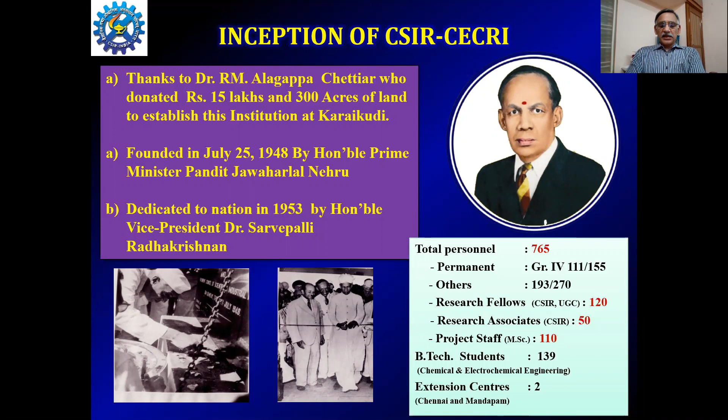Devoted fully to electrochemical science and technology, CECRI has various core strengths: corrosion and material protection, electrochemical power systems, electrodics, electrocatalysis and bioelectrochemistry, electroplating and metal finishing, electroorganic and material electrochemistry, and electrochemical process engineering.

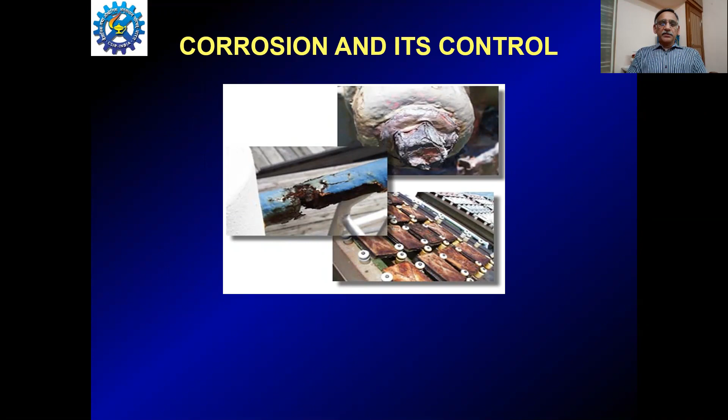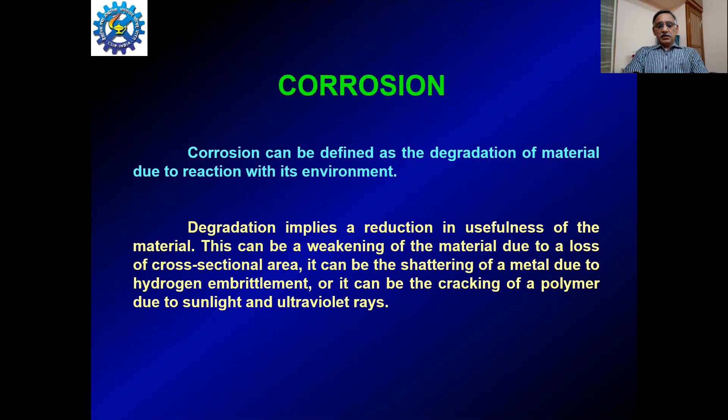Coming to the subject, corrosion and its control. What is corrosion? Why is it so important? Let me start my talk with the book definition of corrosion. Corrosion can be defined as the degradation of material due to its reaction with its environment. This degradation may be the reduction in the useful properties of the material, or the weakening of the material due to thinning and so on and so forth.

Corrosion causes huge economic loss, not only to the industries but also to the households. For a nation, whether it is developed or under development, it amounts to around 3 to 5% of its GDP towards corrosion and its mitigation. There are various losses which make corrosion so significant. It can be classified into two categories: direct losses and indirect losses.

For example, the cost of materials lost due to corrosion comes under direct loss. The cost due to coatings and their application to mitigate corrosion comes under direct loss, and the use of corrosion inhibitors, or the cost of corrosion inhibitors, also comes under direct losses.

There are other indirect losses also. For example, if a company or industry is forced to shut down due to a corrosion problem, then the production time lost and the product lost is also an indirect loss - loss of product, probably leakage of some petroleum products, etc. in the petroleum industry, and loss of efficiency, for example, the loss of heat transfer efficiency of heat exchangers due to corrosion, or contamination of food products.

For example, if it is a food material manufacturing industry, for example infant foods and so on, the existence of corrosion at one point or other may contaminate the product and make it non-saleable. It also leads to the conservation of metal resources and ultimately human safety. If it is a collapse of a bridge due to a corrosion problem, or a collapse of a multi-story building or a nuclear reactor due to corrosion, ultimately it results in a human safety issue.

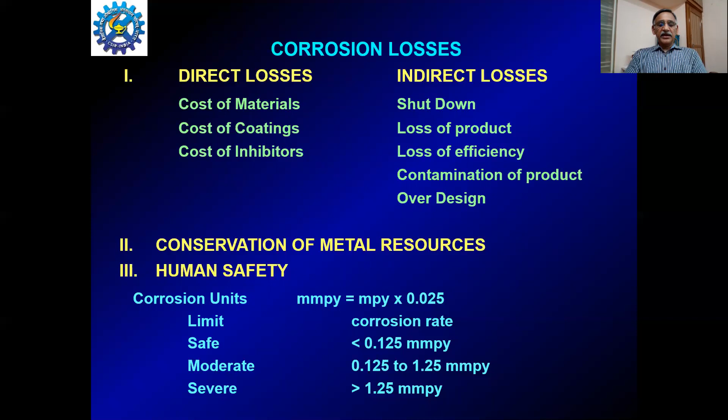Like blood pressure or diabetes, corrosion can also be classified into 3 categories. If the rate of corrosion is less than 0.125 millimeter per year, it is designated as safe. If it is 0.125 to 1.25 millimeter per year, it is moderate - one can live with it. And if it exceeds 1.25 millimeter per year, it is termed severe corrosion, and one needs immediate attention to be paid to it.

Let me go into the little chemistry part of corrosion. For example, take magnesium metal. When magnesium is exposed to atmosphere or immersed in water, it will have a reaction like this: magnesium plus water plus oxygen gives magnesium hydroxide.

The delta G, which gives the free energy for this reaction, is minus 142,600 calories. Take the example of gold.

If a similar piece of gold is placed in water or kept in the atmosphere, gold plus water molecule plus oxygen gives this hydroxide. The Gibbs free energy for this reaction, delta G, is plus 15,700 calories.

A higher negative value of Gibbs free energy predicts that a reaction is more spontaneous, whereas a high positive value says that it is not at all spontaneous.

So among the metals, there are some metals which can immediately react to the environment, and they are called active materials as far as corrosion is concerned.

There are some metals like gold which will not react spontaneously with the environment, leading to corrosion, and hence they are called noble metals. Where are these metals obtained from?

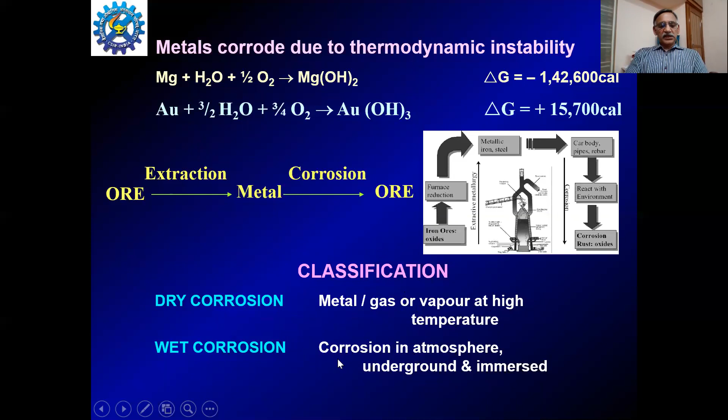We normally come across this wet corrosion, and we are going to see the chemistry part of wet corrosion in the coming slides. Let me take the example of zinc, which is a highly active material.

Zinc dissolves with hydrogen evolution. All chemistry students or chemistry faculties know this.

When a piece of zinc is put in a beaker of hydrochloric acid, this is the reaction which will occur: zinc plus hydrochloric acid gives zinc chloride plus hydrogen.

One atom of zinc metal reacts with two molecules of hydrogen chloride to form one molecule of zinc chloride plus one molecule of hydrogen gas.

This is very spontaneous. Immediately when you put zinc into the hydrochloric acid beaker, this reaction takes place. So zinc is known as an active metal, as I already mentioned.

Take the example of platinum. If you put platinum in the same acid, it does not react. Hence, as I already mentioned, platinum, like gold, comes under the category of noble metal.

Let me explain the reactions involved in this process using a small cartoon. Take a small rod of zinc, and this is a small beaker containing hydrochloric acid.

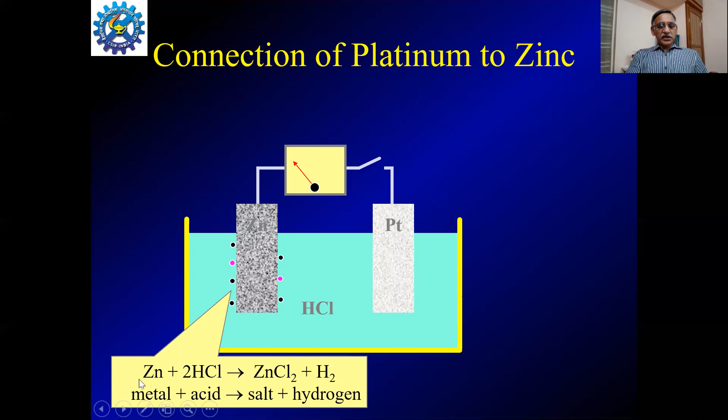Now, the reaction, as I already introduced: zinc plus 2HCl gives zinc chloride plus hydrogen gas. Now I am connecting this switch.

Now the switch is connected, so the zinc is electrically connected to the platinum. What happens here? The zinc metal dissolution occurs on the zinc surface. You can see all the pink dots got transferred to the platinum surface because there is an electrical connectivity between these, and also you can notice that here the current flows.

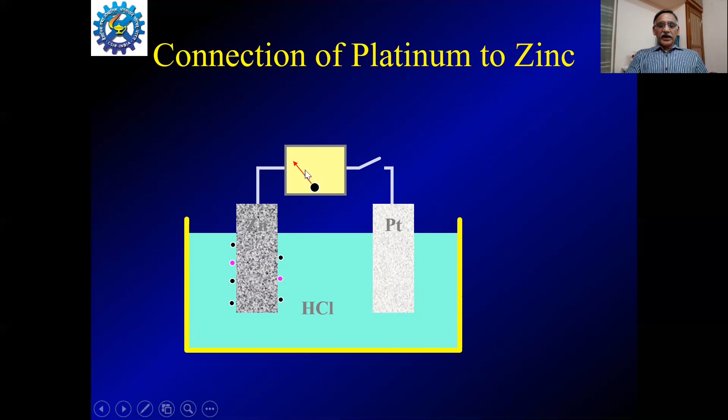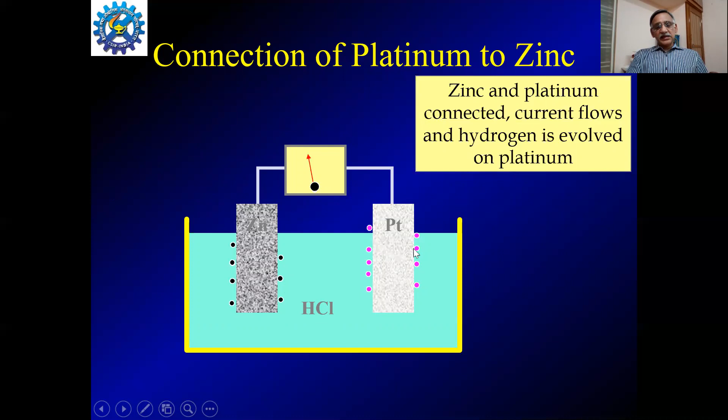When the switch is open, there is no flow of current. When the switch is connected, there is a flow of current. Zinc and platinum connected, current flows, and hydrogen is evolved on platinum. Here you can see only black dots, that is the metal dissolution on zinc surface, and the pink dots, that is the hydrogen gas evolution on the platinum surface.

Here what happens? 2H plus, the hydrogen ions available in the hydrochloric acid, plus the electrons which are available from the zinc dissolution, which are transported through this wire, reaches the platinum surface, reacts and forms hydrogen gas.

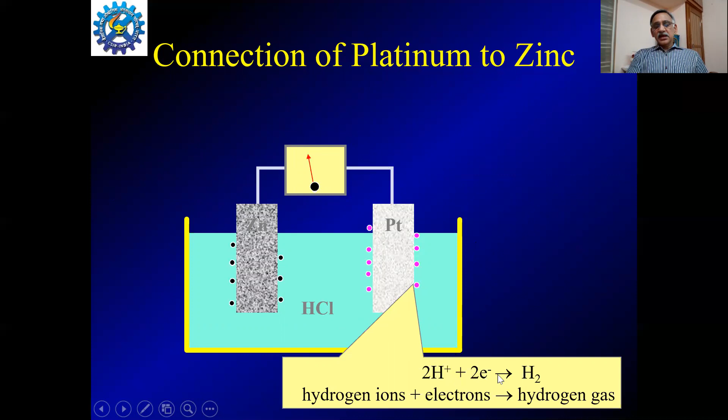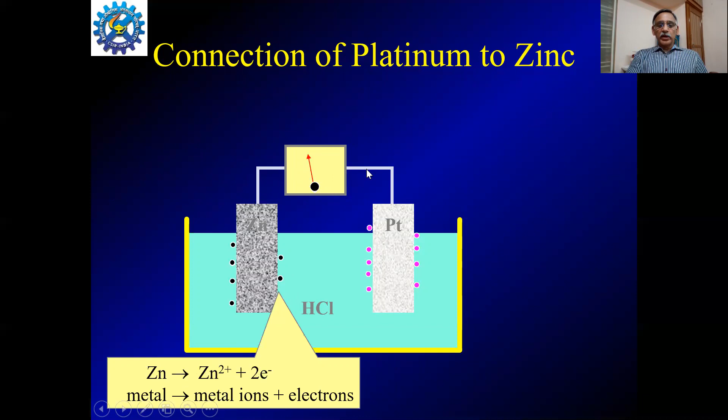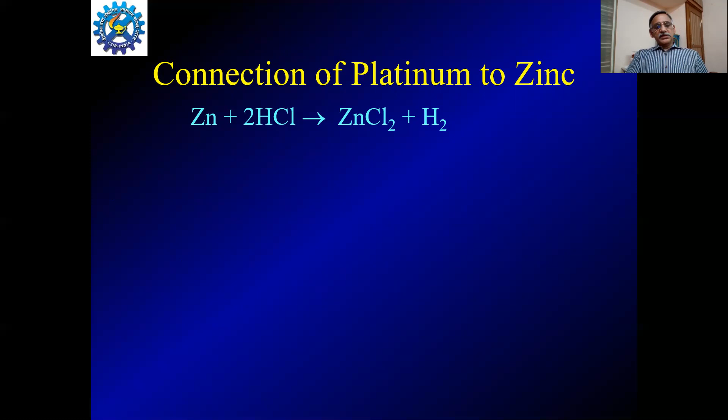So the reaction occurring here is zinc dissolves into zinc 2 plus ions. These ions, black colored dots, leave the metal matrix and go into solution as zinc ions. And these two electrons are liberated, and these electrons travel through the external wire to the platinum surface and get consumed like this. So when we connect zinc and platinum together in a hydrochloric acid trough, this original reaction, zinc plus 2HCl gives zinc chloride plus hydrogen gas, can be split into two reactions.

One is zinc gives zinc 2 plus ions plus 2 electrons. One atom of zinc metal dissolves and gets into solution as one zinc ion, which is into the solution, and 2 electrons remain on the metal surface.

And these 2 electrons get transferred to the platinum surface by the reaction, and there it will consume 2 hydrogen ions available in the acid near the surface of the platinum, combining with these 2 electrons which are liberated here and transported to the platinum surface to form hydrogen gas.

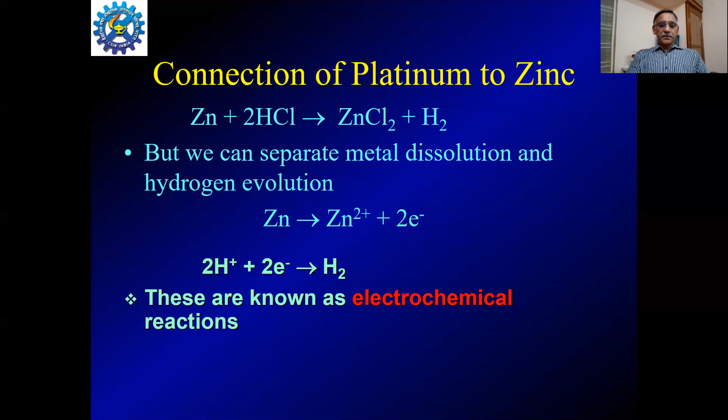These are known as electrochemical reactions. Why is it so? It is not only a chemical reaction, it involves the electrons also. So a chemical reaction involving electrons is termed as an electrochemical reaction. Hence, the corrosion phenomena itself is an electrochemical reaction. Reactions that involve both chemical change and the transfer of charge are termed as electrochemical reactions.

So the various reactions, like the previous zinc gives zinc 2 plus 2 electrons, these are called anodic reactions. The various examples are zinc gives zinc 2 plus 2 electron, zinc corrosion. Iron gives Fe2 plus 2 electron, iron corrosion. Aluminum corrosion, and then ferrous ion further oxidation, etc.

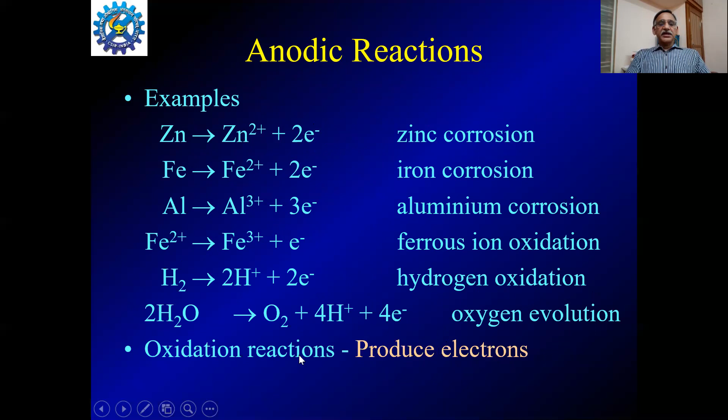In all these cases, the electrons are liberated, or these reactions produce electrons, and they are termed as oxidation reactions, or otherwise called anodic reactions. Similarly, cathodic reactions are those which consume electrons.

For example, the water molecule plus the dissolved oxygen plus the electron gives 4 OH. This is oxygen reduction, hydrogen evolution, copper plating, ferric ion reduction, and all. Here you can see all reactions consume electrons, and they are called reduction reactions or cathodic reactions.

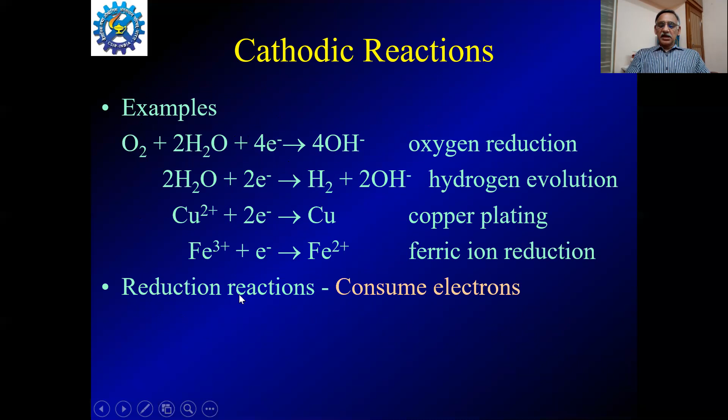So, in a nutshell, say for example, if you take the case of iron in hydrochloric acid, similar to zinc, if you place a small nail in hydrochloric acid, you will have the reaction Fe plus 2 hydrochloric acid gives FeCl2 plus hydrogen gas. This can be split into 2 reactions as earlier.

Fe gives Fe2 plus 2 electrons, which is an anodic reaction or oxidation reaction. And another one is 2H plus 2 electron giving hydrogen gas. This is a cathodic reaction.

So what one should know is the corrosion reaction is an electrochemical phenomena. This reaction itself is constituted by 2 complementary reactions: one is anodic reaction and another cathodic reaction. These 2 reactions occur simultaneously.

So if you want to control corrosion, any one of the reactions should be stopped. For example, if one can stop this hydrogen gas evolution in the acid medium, then the corrosion will not proceed, because charge neutrality has to be maintained.

Various examples for other environments: if it is an atmospheric corrosion, the anodic reaction is metal dissolves, giving metal ions plus electrons, and ultimately it forms, with the available moisture, metal hydroxide. The cathodic reaction will be the oxygen and water molecule or moisture plus these electrons giving hydroxyl ion formation.

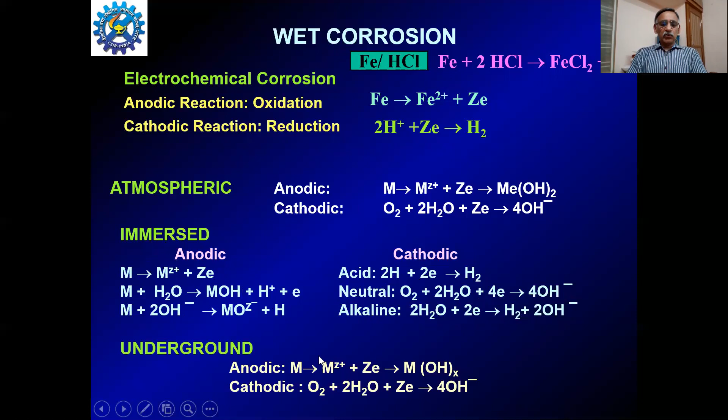Similarly, for the immersed condition, we have the metal dissolution as anodic, and if it is an acidic environment, the hydrogen ions available in the solution combine with the electron to form hydrogen gas. If it is neutral, the dissolved oxygen available in the water combines with the electron to form hydroxyl ions, and in alkaline, the water reacts with the electrons to form these kinds of hydroxyl ions. Similarly, for underground also, we have anodic and cathodic reactions.

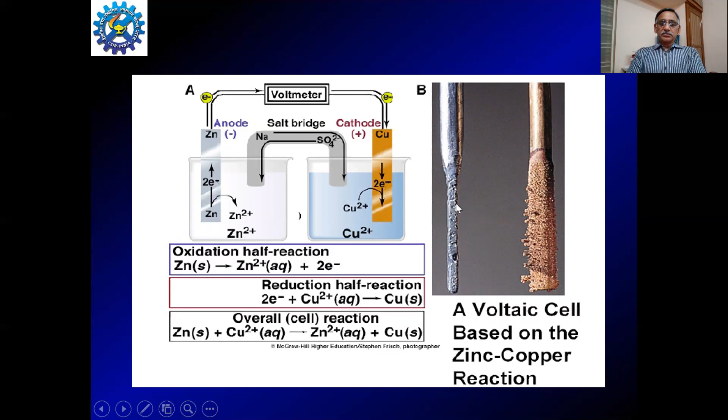On reaching the copper, there are plenty of Cu2+ ions available in copper sulfate solution, and they combine together to form copper atoms and get deposited over the surface. After some time, the zinc rod dissolves or thins due to corrosion, whereas copper electrodeposition occurs and hence thickness increases.

If you take a beaker containing hydrochloric acid and put zinc and iron in it, you can witness a vigorous corrosion reaction with enormous gas bubbles or hydrogen gas evolving from the surface of these metals.

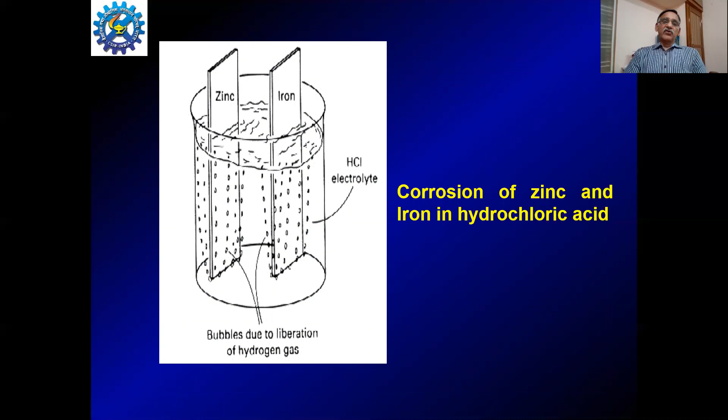How has this happened? Earlier I demonstrated that when we combine zinc and copper, zinc is the anodic or active metal, and copper is the noble or cathodic metal.

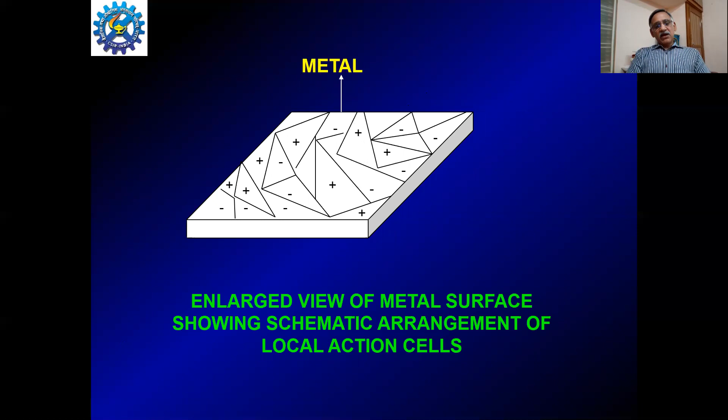If you have only zinc or only iron, still the corrosion is occurring and there are plenty of gas bubbles or hydrogen evolution. It is because on a single metal surface, for example zinc, we have anodic sites and cathodic sites which are very adjacent to each other. At the anodic site, the metal dissolves and the electrons get transported, and at the cathodic site, gas evolution occurs. So the same metal will have both anodic and cathodic sites, and accordingly it will have corrosion.

In a nutshell, when zinc is immersed in hydrochloric acid, zinc metal dissolves or dissociates from the metallic matrix and goes into solution as zinc 2+ ions. These electrons combine with hydrogen ions available in the hydrochloric acid to form H2 gas. This is the final version, or one can understand that corrosion phenomena.

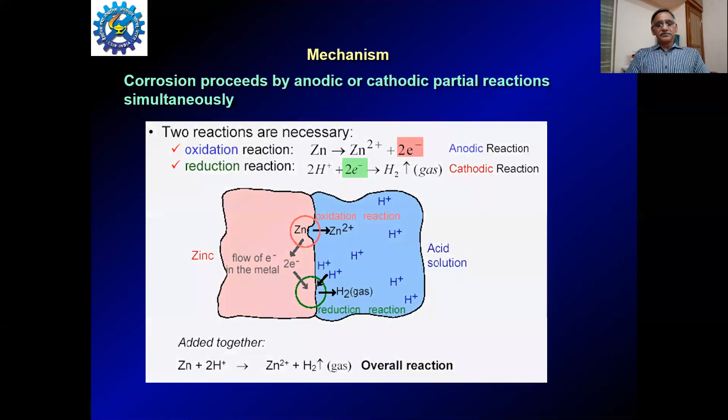The corrosion can be prevented by coating, inhibitors, cathodic or anodic protection, and design for higher wall thickness and so on. Let me introduce these things in the coming slides.

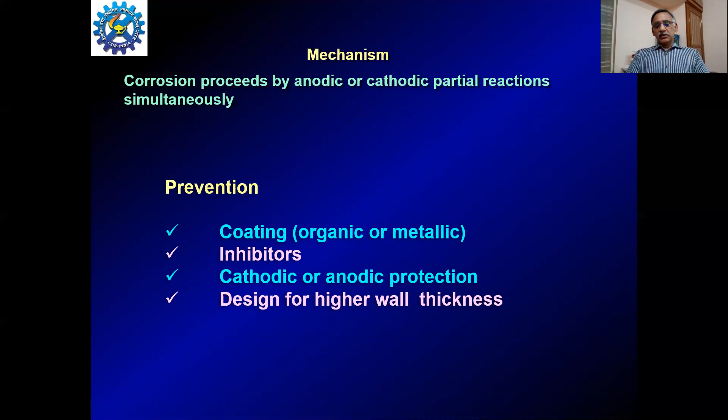There are various factors which influence corrosion. The composition of the material itself causes various anodic and cathodic sites available on the same material, whether it is a homogeneous single phase alloy; the cold working, grain shape, grain size, and so on decide where it is anodic and where it will be cathodic.

If it is a multi-phase alloy, distribution of the amount of anodic phase matters, for example aluminum copper alloy will have aluminum anodic areas and copper cathodic areas. Similarly, heat-treated alloys, for example stainless steel, will also form sensitive grain boundaries, and they will become anodic areas.

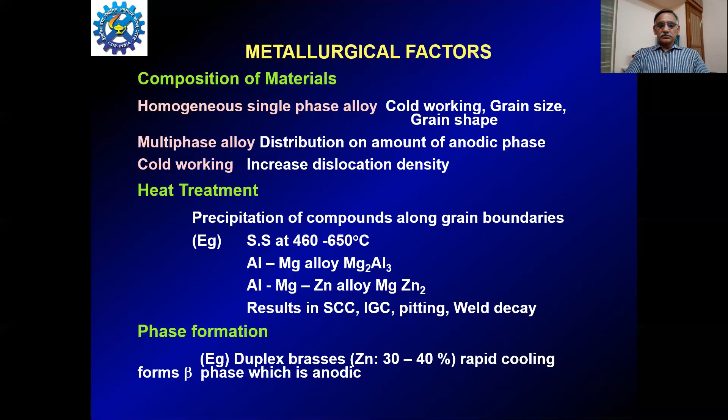Other factors which influence corrosion are summarized here. If we take three environments, atmospheric exposure, immersion in liquid, or underground, what are the factors that influence corrosion? In atmospheric conditions, the dust available in the atmosphere is a major culprit. This dust settles over the surfaces and is hygroscopic in nature, retaining moisture. Because of this moisture retention, it also influences corrosion. A lot of dust in an industrial atmosphere causes moisture retention and influences corrosion.

When it retains moisture, gaseous contaminants from nearby industries, such as carbon dioxide, H2S, or SO2, or in a marine atmosphere, chloride ions, also get retained by the moisture or the dust, and hence influence corrosion in a greater way.

In immersion conditions, the pH of the solution plays a major role. In addition, various dissolved gases like oxygen, carbon dioxide, H2S, or SO2, various dissolved salts, availability of bacteria, temperature, and velocity if it is a flowing medium all decide or influence corrosion in a greater way.

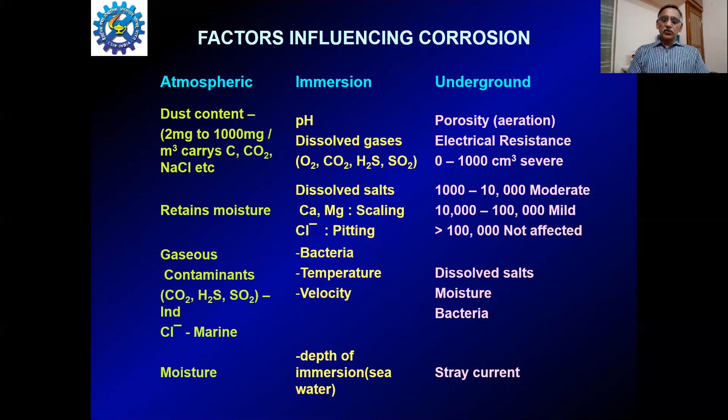It is being normally monitored by the electrical resistance of the soil. If the soil has a resistance of say 1000 to 10,000 ohm-centimeters cube, then it is moderate, and if the resistance is above 1 lakh, it is not at all affected. Various dissolved salts, the moisture available, the bacteria available, and the influence of stray current, the current induced by nearby electric tracks, also influence corrosion to a greater extent.

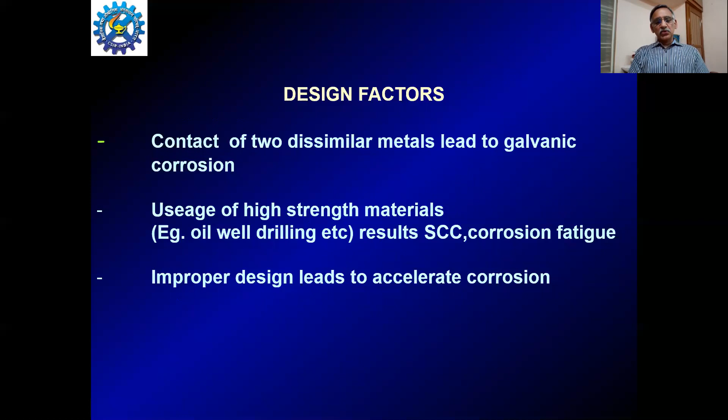Other parameters which influence corrosion are: if we have two dissimilar metals which are connected or joined together, then it leads to a particular corrosion called galvanic corrosion. Let me explain it in the coming slide. Use of high strength materials also causes corrosion, as does improper design. These are all the various factors which influence corrosion.

Under general corrosion, we have uniform corrosion, galvanic corrosion, de-alloying, and cavitation corrosion. In localized corrosion, we have pitting, crevice, intergranular, filiform, etc. Under mechanical corrosion, we have stress corrosion cracking, hydrogen damage, corrosion fatigue, fretting corrosion, and so on and so forth.

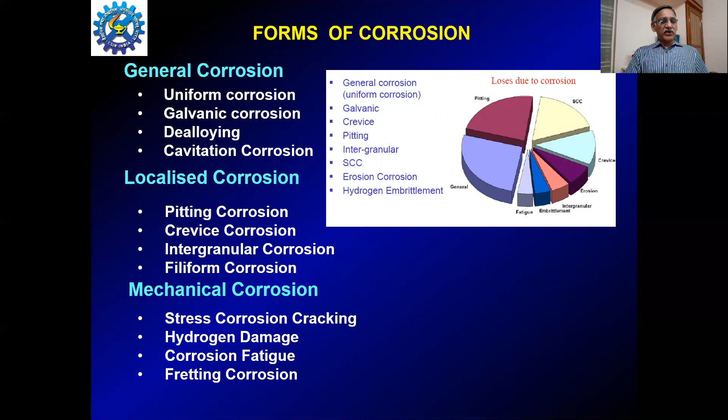Let me, in the coming slides, give a small flavor about this corrosion, because these forms of corrosion themselves are a big lecture to be delivered for 2 hours or so.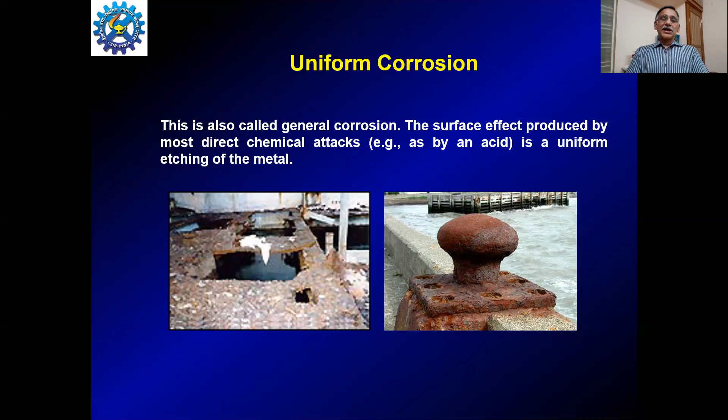Uniform corrosion is a corrosion where the entire surface corrodes uniformly - a surface normal electrochemical reaction which causes rusting over the entire uniform surface. In one way, uniform corrosion is advantageous because the corrosion rate can be easily determined and corrosion can be easily controlled.

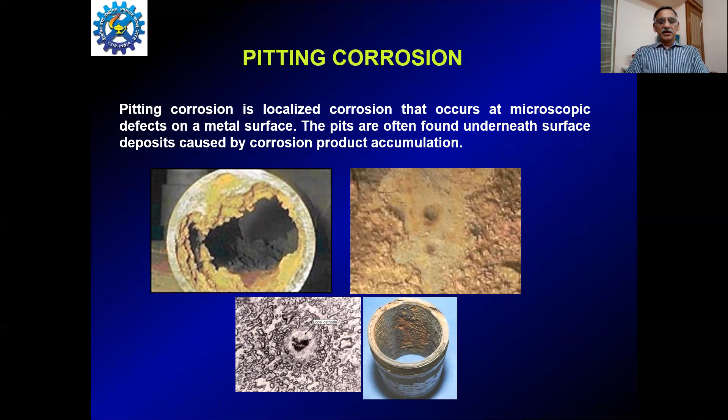Pitting corrosion is a localized corrosion where the corrosion occurs in microscopic defect areas on the metal surface, and it is very dangerous because it cannot be easily predicted, and the existence of pitting can be known only when leakage occurs. Crevice corrosion: when two flanges are joined or pipe ends are joined, they normally use a gasket in between to avoid leakage.

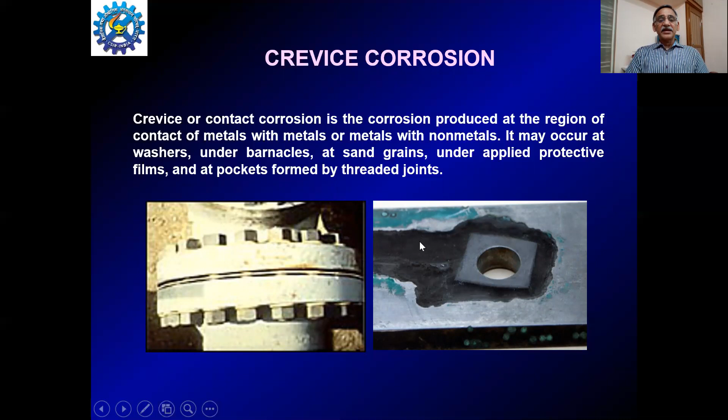And under this shielded area, there will be a corrosion which is influenced by the stagnant electrolyte available in this area. This is called crevice corrosion.

Galvanic corrosion: when two dissimilar metals are connected, the active metal will corrode at a faster rate and a noble or passive metal will have no corrosion. For example, in the household, we might have seen a GI pipe with a brass or copper tap. Since brass is more noble compared to GI, this GI corrodes.

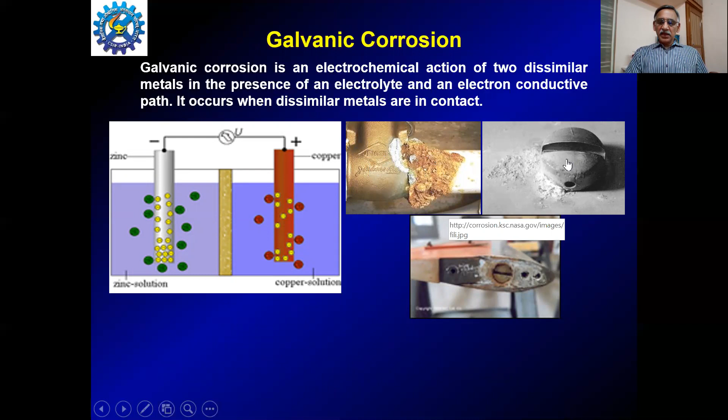Similarly, if you have an aluminium sheet with a rivet, and this rivet is a different, noble metal, then the aluminium corrodes at a faster rate.

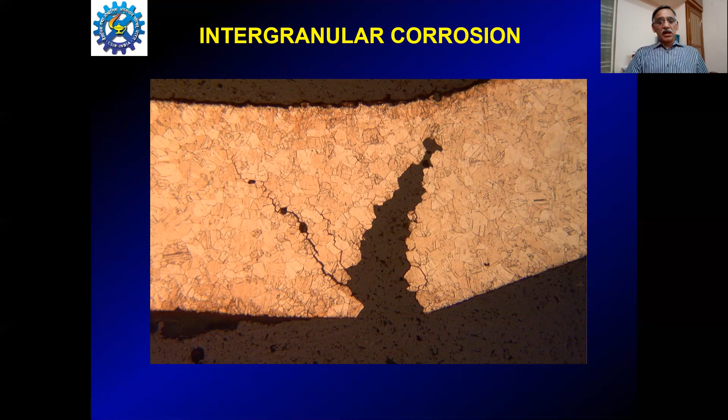Intergranular corrosion is a special form of corrosion which occurs through the granular boundaries. De-alloying is a certain type of corrosion under certain conditions.

For example, brass, which is an alloy of zinc and copper - under certain conditions, the zinc alone leaves the metal matrix, leaving behind a copper-rich surface. It is called dezincification. This is a special type of de-alloying.

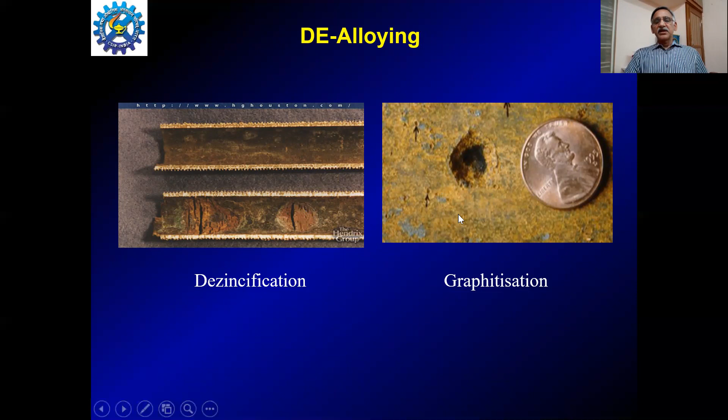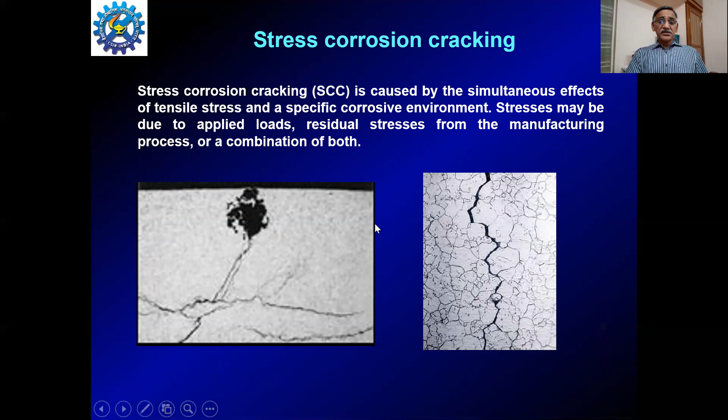Similarly, graphitization is where the iron leaves the surface, leaving behind a carbon-rich surface. Filiform corrosion is a corrosion which occurs beneath the film. Stress corrosion cracking is due to the coexistence of stress and a chemically corrosive environment.

Hydrogen blistering or hydrogen embrittlement is where hydrogen penetrates through the metal surface and results in blistering of the surface. Corrosion fatigue is a special form of stress corrosion cracking. And fretting corrosion is where a corrosive environment with simultaneous movement or rubbing of surfaces occurs.

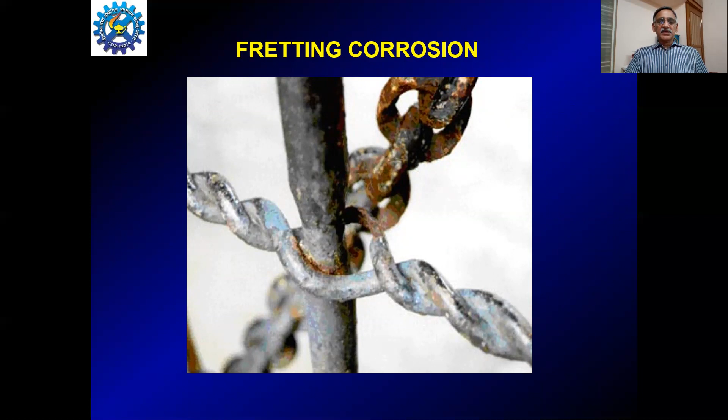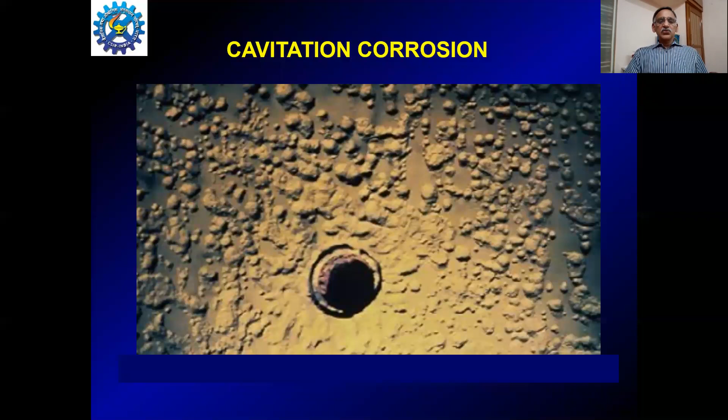Cavitation corrosion is where normal air bubbles occur over the surface, burst, and create a lot of corrosion. So these are all the various forms of corrosion. After giving a flavor of various forms of corrosion, let me take you a little deeper into the thermodynamics part of corrosion.

You may have heard about the EMF series, standard electromotive force series. It is nothing but an arrangement of metals based on their standard reduction potential. Here, in arranging these metals, the hydrogen reduction potential is assumed as zero. With reference to hydrogen, all the metals' potentials were measured in their own ionic environment. They are called standard EMF values and are listed here.

Some metals stand above hydrogen and have a positive potential, while some are below hydrogen with negative potentials. Metals below hydrogen, having negative potential, can easily liberate hydrogen and hence easily undergo corrosion. Metals above hydrogen, having positive potentials, do not liberate hydrogen easily and hence are not involved in corrosion. This table therefore has a noble metal end and an active metal end.

This table is highly useful for a corrosion engineer to predict corrosion. For example, if we are supposed to select a metal, this table suggests that compared to zinc, which has a high negative value, nickel is preferential. Even though nickel is also prone to corrosion, it will experience less corrosion because it's much less negative compared to zinc. Similarly, if the choice is between zinc, nickel, and copper, one can choose copper because it has very little or almost negligible corrosion compared to the other two metals.

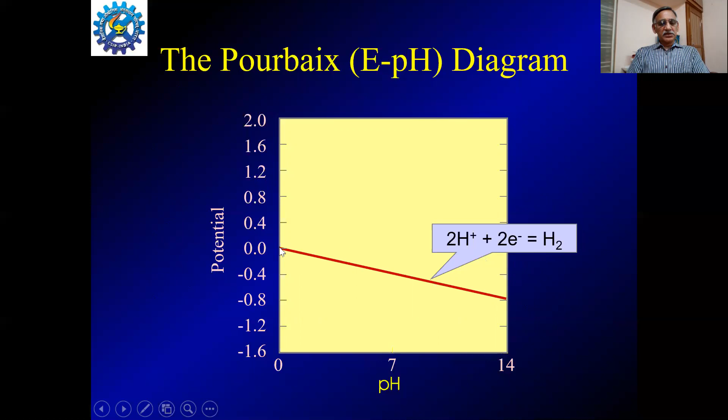This line in this potential-pH diagram represents various chemical equilibriums. For example, this red line represents the hydrogen equilibrium: 2H+ plus 2 electrons gives hydrogen gas. As you might have seen in the EMF series, its potential starts from 0, so this line represents the hydrogen equilibrium line.

What does it mean? Below this line, hydrogen is stable in gas form, whereas above this, water is stable under various pH and potential conditions. Similarly, the oxygen reduction line is 2H2O gives O2 plus 4H+ plus 4 electrons.

This is represented by these green lines starting from around 1.3. What does it mean? It means above this green line, O2 is stable. Now you can see in between the red and green line, water will be stable as a water molecule. If we cross this green line, oxygen is stable in gas form, and if we go below this red line, hydrogen is stable again in gaseous form.

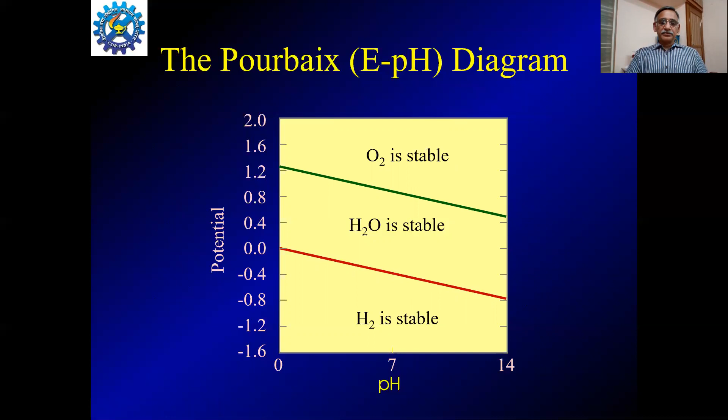Now let us take the very same example of zinc corrosion. This line represents the equilibrium of zinc giving zinc 2+ plus 2 electrons. Its EMF potential is around minus 0.9, and this line represents this equilibrium.

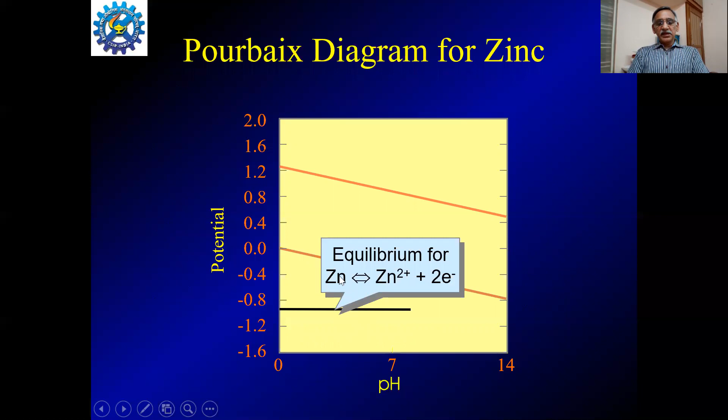That means zinc metal is stable below this line, and zinc ion above. You can see here, this is the equilibrium between zinc metal and zinc ion, so this line is the boundary between these two species. Above this line, zinc 2+ is stable. Below this line boundary, zinc metal is stable.

And this line represents an equilibrium of zinc 2+ with 2OH minus. Because going to higher pH values, we'll have more hydroxyl ions. So zinc ion plus 2OH gives zinc hydroxide. This vertical line is the boundary between zinc ion and zinc hydroxide. Already we have mentioned that zinc 2+ is stable here.

This clearly shows that on the left side of this line, zinc ion is stable. On the right side of it, zinc hydroxide is stable in solid form. This cross line represents zinc plus hydroxyl ion giving zinc hydroxide. Here you can see it is again the equilibrium between zinc metal and zinc hydroxide with the available hydroxyl ions. So as you can clearly see,

this small domain is where zinc hydroxide is stable. It is sure that below this line, zinc metal is stable. This line represents the equilibrium between zinc hydroxide and further zinc O2 minus ion. This vertical line is the boundary between zinc hydroxide and this species, with increased availability of hydroxyl ions. So you can see on the left hand side, zinc hydroxide is stable. On the right hand side, we have zinc O2 minus ion available, which is stable in the solution.

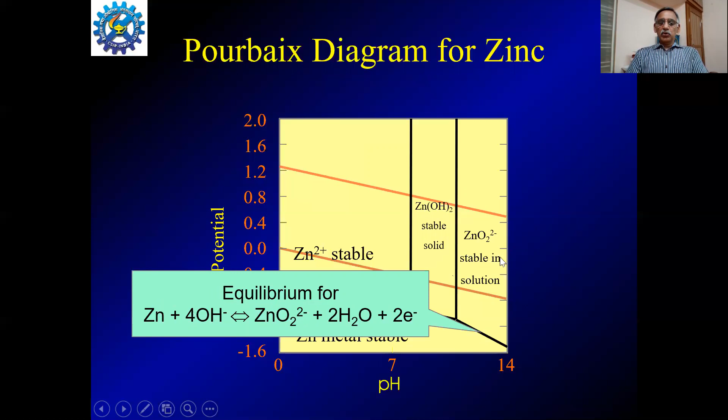The final line is: zinc, with very high concentration of hydroxyl ion availability, may get transformed into zinc O2 minus plus water plus electron. So this line gives the boundary between zinc metal and zinc O2 minus. Already zinc O2 minus is available here, so this is an equilibrium between these two species.

Here we have seen, under various potential and pH conditions, below this line, zinc metal is stable. This very big area with a boundary of this line and this line, we will have zinc 2+ ion stable under various potentials and pHs. Going to higher pH, under these various potentials, zinc hydroxide is stable for a short area, and then it will get transformed to zinc O2 minus.

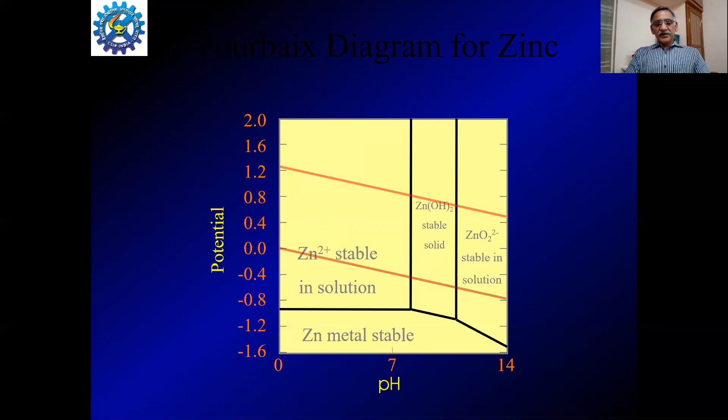Now, the area where the zinc metal is stable is called the immune domain or immunity domain. Under these potential and pH ranges, if we have zinc, zinc will be stable. It will not undergo corrosion at all. That means zinc is immune to corrosion.

The area where zinc is available in ionic form, here and here, is called corrosion. It is because of corrosion that it occurs in these big areas of huge potential range and pHs, where we will have zinc existing in the form of ions, and hence they are called the corrosion domain or corrosion region.

A small narrow region where zinc hydroxide in solid form is stable is called passive. Here there will be initial corrosion so that the zinc metal gets transformed to zinc hydroxide, but it will cover the zinc surface and form a film over the surface, and hence the metal will become passive.

So as you can see here, the entire potential-pH region can be classified into three domains, namely immune domain, corrosion domain, and passive domain. The metal, in this case zinc, if maintained in these potential-pH conditions, will not corrode at all—it is under immune condition. This is normally called cathodic protection.

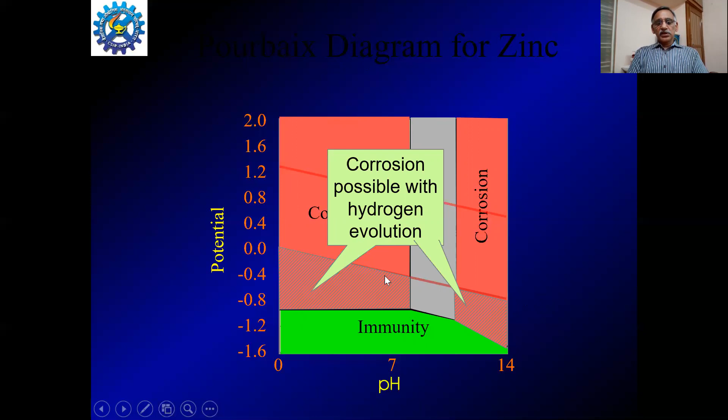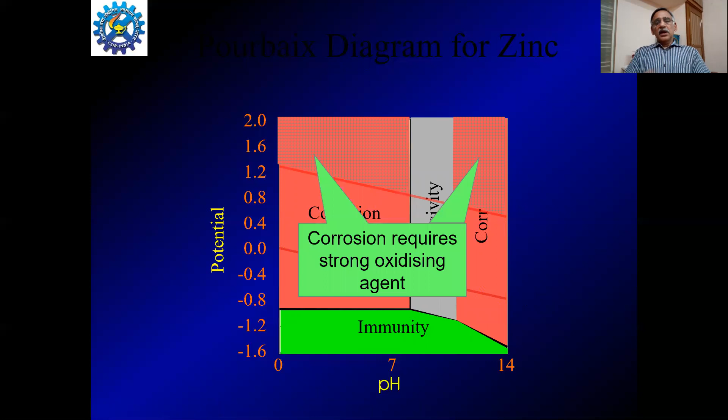Corrosion is thermodynamically impossible in the immune domain. Corrosion is possible but likely to be stifled by solid corrosion product. Recall this slanting line is the hydrogen equilibrium. Below that, in these red zones, corrosion is possible with hydrogen evolution as the cathodic reaction, and here with oxygen reduction. Under these high positive potentials, corrosion requires some strong oxidizing agents.

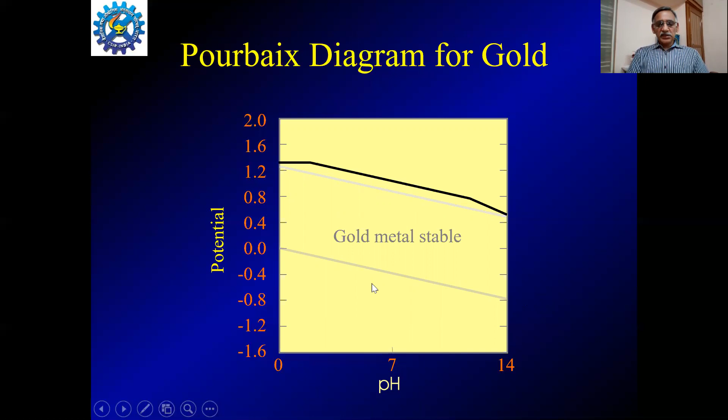Similarly, let us take the example of gold. Here is the hydrogen equilibrium line and the oxygen equilibrium line. Gold has a very big immune domain, which is why it does not corrode under various potential or pH ranges. So normally, day to day, if gold is kept in any of these areas, it will be immune, and it also has a very big passivity domain. But gold can also corrode under specific conditions of potential and pH.

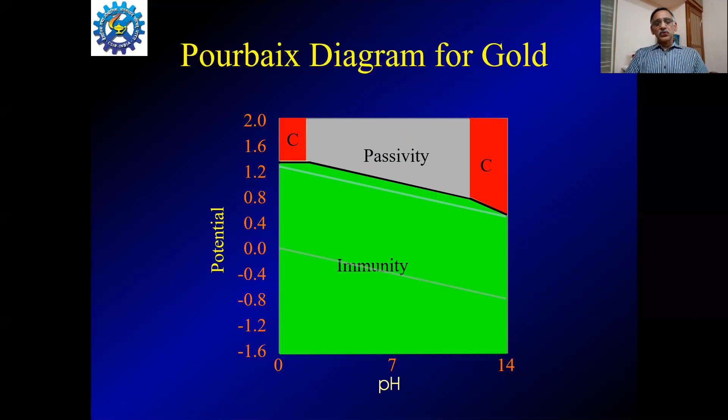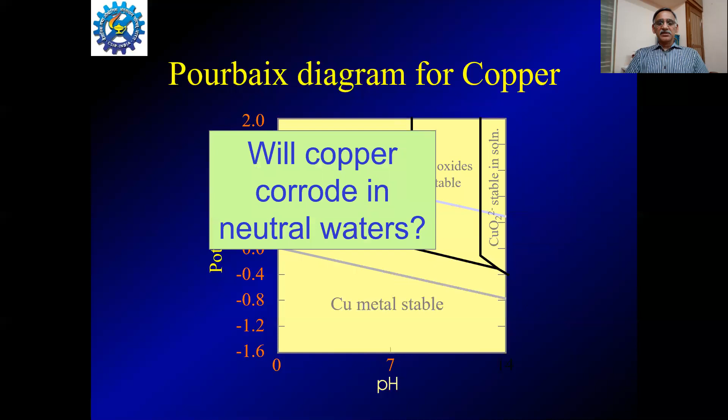Similarly, for copper, we have the copper pH diagram: copper metal stable, copper 2+ stable, copper oxides. Here you can see the immune domain, and this is corrosion, and this is also corrosion, and this is the passive domain. Will copper corrode in acid? No, because the hydrogen line is well within the immune domain, so hydrogen evolution only occurs below the potential of copper corrosion, hence copper will not corrode in acid pHs. Will it corrode in neutral? Usually it will just passivate, but corrosion can occur in slightly acidic solutions.

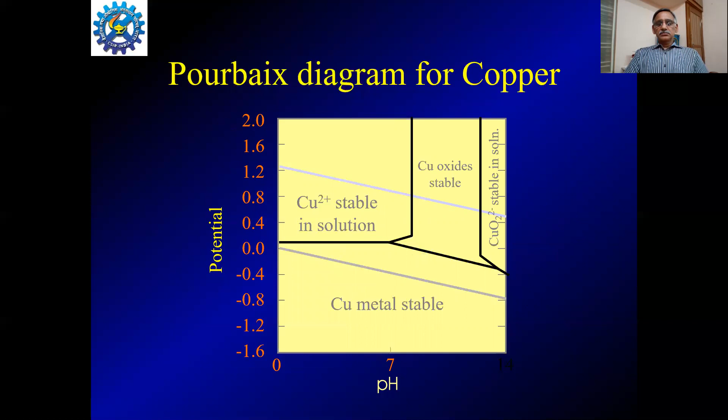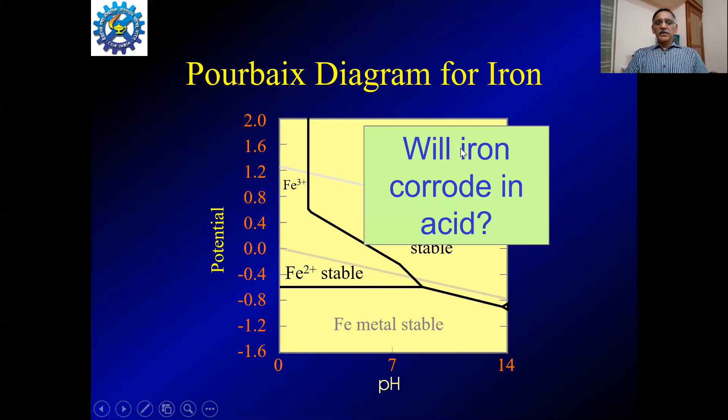Similarly, for iron, we have this immune domain, this corrosion domain, and a big passive domain. Will iron corrode in acid? Yes, since the corrosion domain and the hydrogen line are both present, so by hydrogen evolution it normally corrodes. Will it corrode in neutral? Yes, in neutral it will corrode by oxygen reduction. In alkaline, no — iron forms a solid oxide over the surface and gets passivated. So this potential-pH diagram is a very good tool to examine the various domains, whether the metal will get protected, be totally free of corrosion, or undergo corrosion.

Having covered all these thermodynamic parameters — namely the standard EMF series, then galvanic series, and finally the potential-pH diagram — all these are thermodynamic parameters. Please note, they don't have any kinetic information. That is, they will never tell you the rate of corrosion. They only predict whether corrosion is possible or not. How fast the corrosion will occur cannot be obtained from this thermodynamic data.

The kinetic parameters can be obtained from corrosion monitoring methodologies. Corrosion rate can be determined either in millimeter per year or mils per year, and there are plenty of methods available to estimate the rate of corrosion. In general, it can be classified into three categories: non-electrochemical methods, electrochemical methods, and NDT methods. Non-electrochemical method means, as the name implies, we have nothing to do electrochemically with the corroding metal, and well-known examples are the weight loss or gravimetric method, electrical resistance method, chemical analysis, etc.

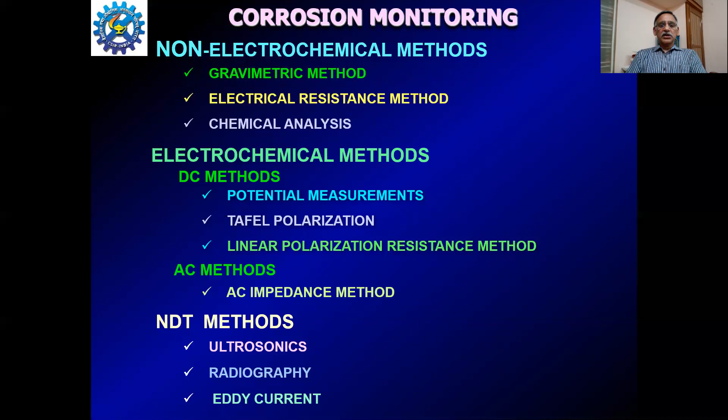Non-destructive testing, or NDT methods, is a very big ocean, useful for various applications including corrosion. Some NDT methods, for example ultrasonics, radiography, and eddy current, find immense application in getting corrosion rate details. Since corrosion monitoring or rate estimation is itself a very big area, I have just given a flavor that such methods exist and, based on various principles, corrosion rates can be estimated. I'm leaving this here because, as I said, covering forms of corrosion will itself be yet another lecture of about two hours. So please know that it is possible to estimate rates of corrosion — I will cover these corrosion control and monitoring methods in a separate lecture.

Having said all this about corrosion - various forms of corrosion, thermodynamic aspects of corrosion, and the rates of corrosion and how we can determine them by various means - let me cover some information about the various corrosion control methods. Given the importance and complexity of corrosion and the economic losses it brings, one has to seriously think about corrosion control methods. It is not a simple thought that we can simply live with corrosion. That can be applicable for simple cases like household pipes. But imagine huge pipelines carrying petroleum products or flammable gases, where we badly need some corrosion control methods.

These corrosion control methods can be broadly classified into 4 categories. Number 1 is modification of metal. As the name implies, a metal which is corrosive can be converted into another alloy by adding small elements. For example, steel which is highly corrosive in acidic, neutral, or alkaline environments can be made corrosion-free by alloying a small amount of chromium and nickel, getting a stainless steel alloy. This is an example of alloying.

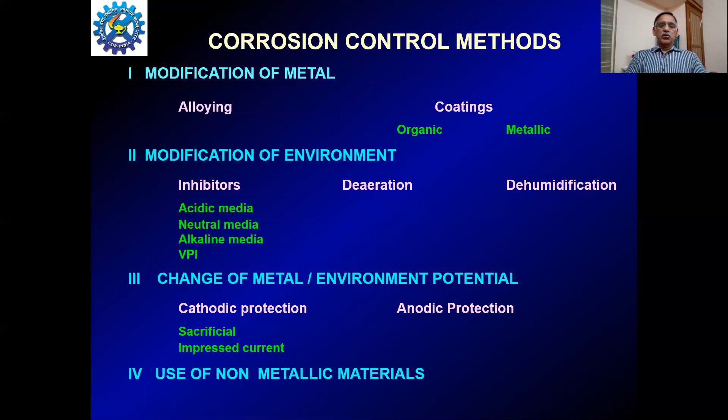Cathodic protection is a very big engineering phenomenon, so I will give a small hint about what it is. It involves artificial conversion of the metal to be protected into a cathode. Recall that in the potential-pH diagram, there is a domain called the immune domain at the bottom. So if the metal's potential is shifted by external means, using a rectifier or a current supplier, and we shift the potential of the metal to the cathodic or immune domain, the metal gets protected.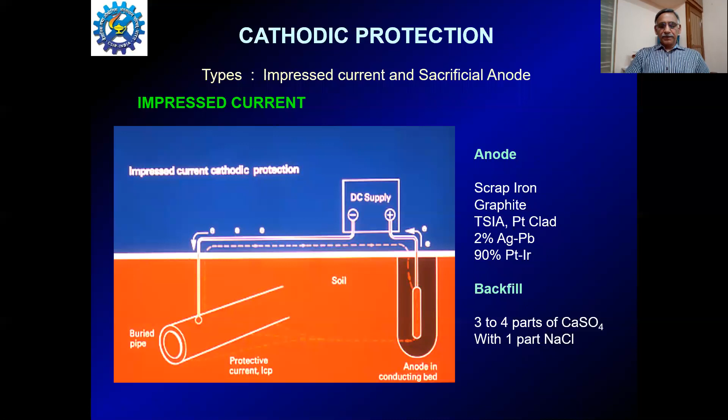The other method is the sacrificial anode. Recall that there are active metals and noble metals. Suppose we want to protect a steel oil platform offshore, which is expected to have high corrosion due to the corrosivity of sea water. If we attach a piece of zinc, magnesium, or aluminium to the steel structure, then as in galvanic corrosion, zinc, being highly active compared to steel, sacrifices its life — it dissolves into solution as zinc ions, giving up electrons which flow through the circuit. Because it sacrifices its life to protect the steel, it is called a sacrificial anode. This small piece of zinc undergoes corrosion and gives protection to the steel structure.

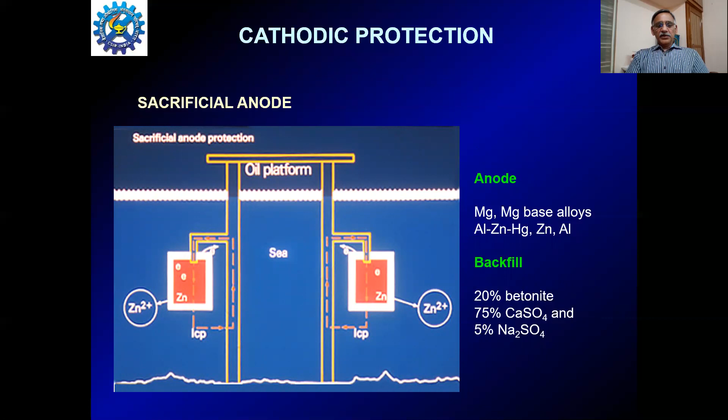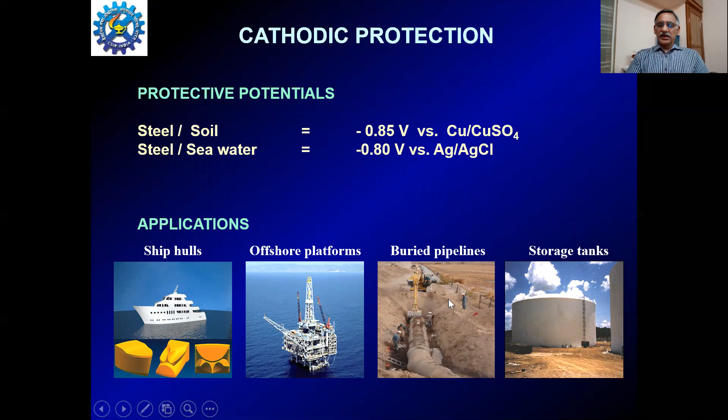This is why you see zinc-coated steel sheets used for industrial roofs, called galvanized sheets. Similarly, galvanized iron pipes are also used — the zinc sacrifices its life to protect the steel sheet or pipe. This finds application in ship hulls, offshore platforms, buried pipelines, or storage tanks. These are all areas where we can have cathodic protection either by sacrificial protection or the impressed current method.

Coming to corrosion inhibitors: as mentioned, these are chemical substances added in small quantities to the environment so that corrosion will be controlled or minimized. Depending on the environment, many compounds are used. For example, in acidic media, mostly organic compounds like amines, azoles, unsaturated alcohols, and aldehydes are added in small quantities, and they either reduce the rate of the anodic or cathodic reaction, or in some cases form a film over the surface and prevent corrosion.

If it is a neutral medium, mostly inorganic compounds like polyphosphate, phosphate, zinc, benzoate, nitrite, etc. are used. In alkaline medium, for example concrete structure is alkaline, mostly nitrite, monofluorophosphate, or citrate are the well-known inhibitors. While making concrete itself, a small quantity of nitrite is dissolved in water and mixed with the concrete ingredients, and if available in the concrete, it gives inhibition to the reinforcement rods inside.

Vapor phase inhibitors protect metals during storage and transport. Dicyclohexyl ammonium nitrite is coated on papers, and these papers are wrapped around the metal surfaces being transported.

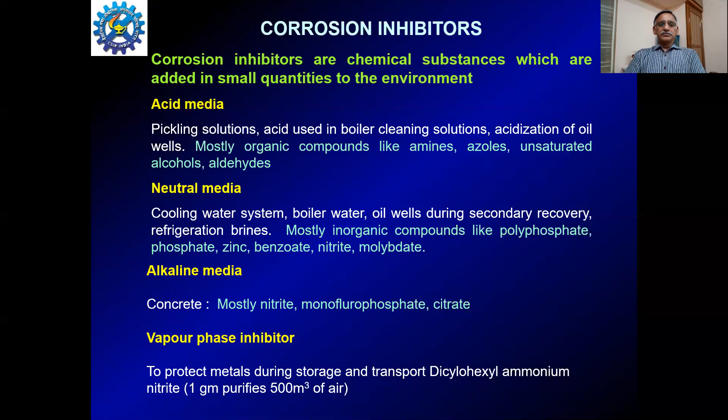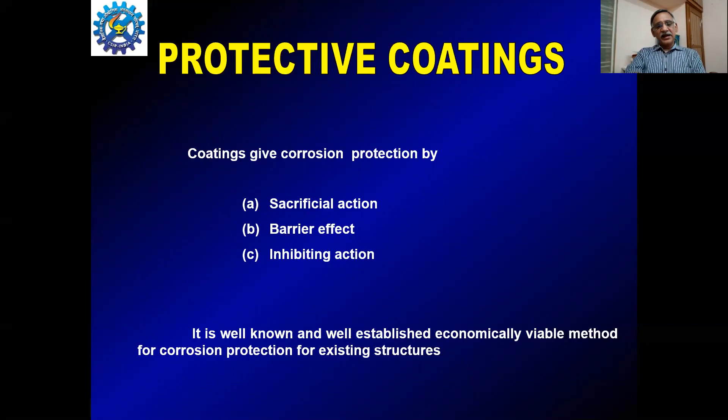Coming to protective coatings: coatings can give protection against corrosion in three ways — sacrificial action, barrier effect, and inhibiting effect. Sacrificial action, for example zinc, magnesium, or aluminum: if you have a zinc coating over a steel sheet, the zinc sacrifices its life and gives protection to the steel. Barrier effect is almost like using a blanket in winter — it simply isolates the active metal from the corrosive environment, thereby stopping corrosion. In the inhibiting action, some inhibitive ions mentioned earlier can be added as an ingredient in the coating, hence preventing corrosion.

Normally we apply black or white paint to window grills or doors, but these are not for corrosion purposes. Corrosion protective coatings are entirely different, and are normally applied as 3 or 4 layers. The first layer over the metal surface is called the primer, whose prime function is adhesion to the metallic surface and to provide adhesion for subsequent coats. There is an intermediate coat where a huge thickness is built, which blocks moisture and ionic transport. The top coat gives resistance to the atmosphere — for example, if the coated metal is exposed to sunlight, the top coating must have ingredients that can withstand UV rays.

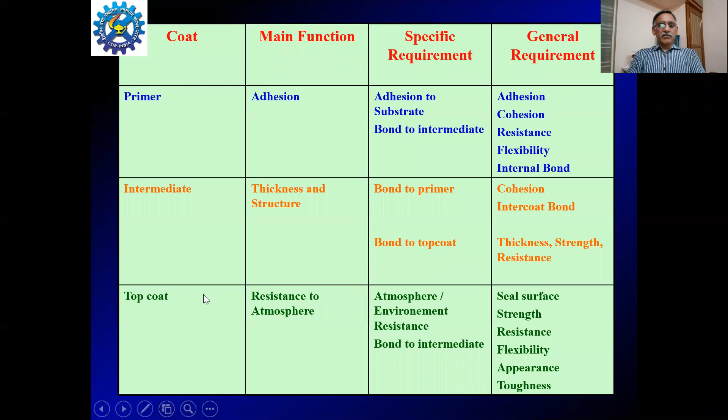If it is immersed, then this layer should have a protective mechanism. This slide clearly explains how. This is a steel structure, and primer is the one which is applied immediately over the surface.

As I already mentioned, it is this area where we add more corrosion inhibitors as pigments, and the success of the entire coating structure depends upon how successful the primer is. It should give good anchorage to the surface, and also good attachment to the subsequent coats - first coat and second coat are the other subsequent coats.

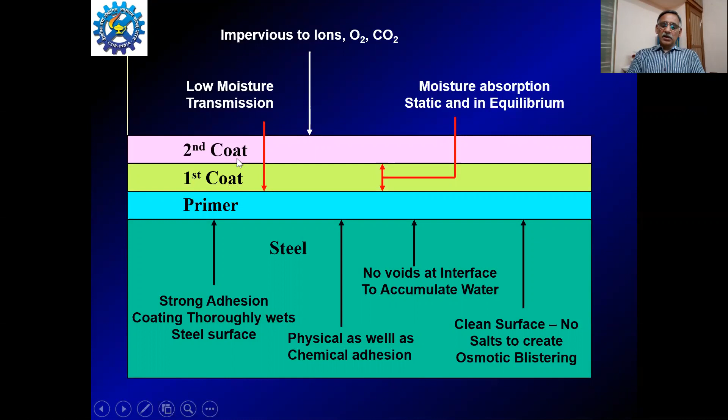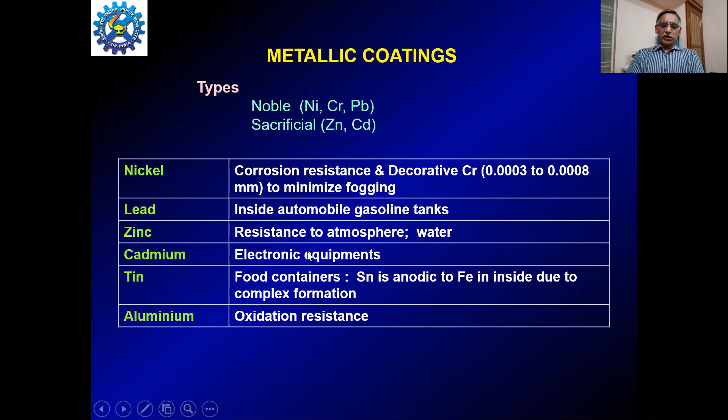In addition, there are certain metals - maybe a noble metal like nickel, chromium, lead - that can be coated, or sacrificial metals like zinc, cadmium can be coated, and these can have various corrosion protective applications as mentioned in this table.

For example, the air oxidizing coating is the enamel - a well-known example which we normally use in our households. Whatever paint we are buying in the hardware shops are all enamel paints.

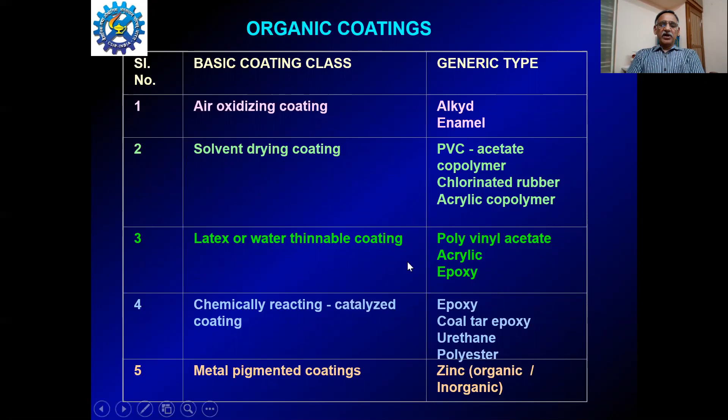And here we have chlorinated rubber, acrylic copolymer and all. They all have solvent as a component. When applied by brush or spraying over the surface, the solvent dries or evaporates, leaving behind the three-dimensional coating matrix. Similarly, water-based coatings and other coatings are mentioned here.

While selecting a particular coating, there are numerous properties to be considered - for example, abrasion resistance, flexibility, color, and gloss retention. For example, if you buy a car, we need a coating - it need not have abrasion resistance, but it should have good color and gloss retention.

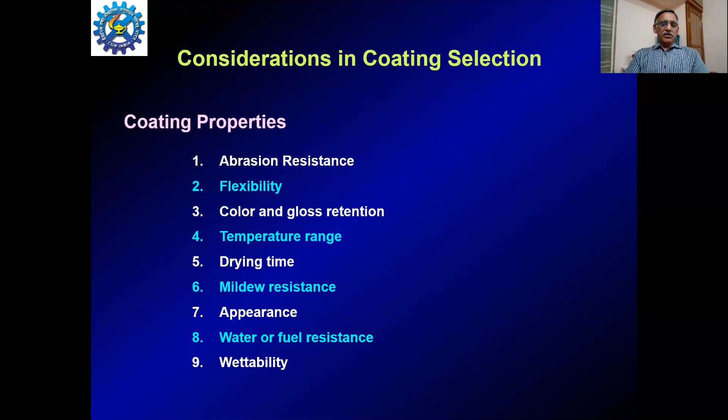Suppose you buy a new car and within 6 months the color fades - it will lose its own value. Similarly, the temperature range, drying time, mildew resistance, appearance, and so on - these are all the various properties which need to be considered before selecting a particular coating.

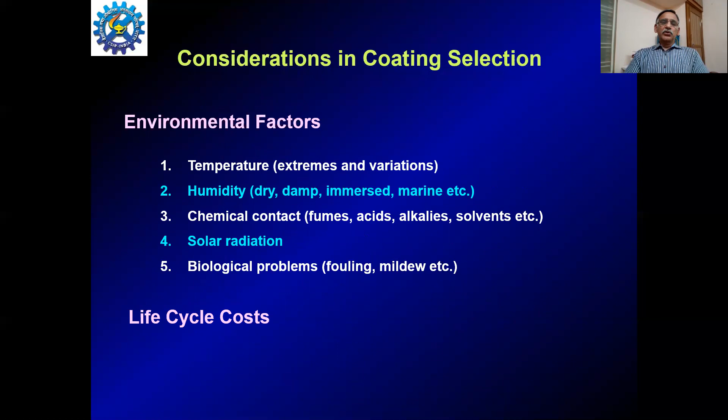Also, under different environmental factors, we have to consider the temperature while applying the paint, the humidity level, chemical contact, solar radiation, biological species, and lifecycle costs. These are all the parameters which need attention before selecting a coating.

Before winding up my lecture, just have a feel: if you spend 100 rupees for industrial protective coating, then 40% of that, or 40 rupees, will go for surface preparation alone. Only 19 rupees we are spending for the coating material, and for application we have the rest of the materials. This is just a cost comparison to show how much we are spending towards coatings.

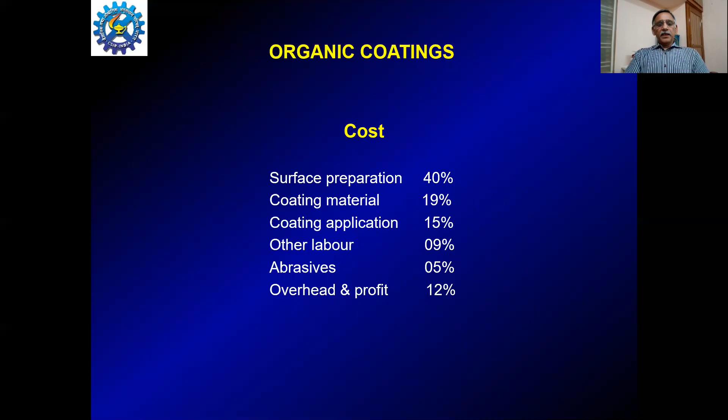I think I have given a very exhaustive look into the corrosion aspects, starting from the definition of corrosion. I have explained the various complementary reactions involved by showing a beautiful image of combining zinc and platinum, and shown that corrosion consists of two complementary reactions - anodic reaction and cathodic reaction. I have also shown the various classifications of wet and dry corrosion, and explained the various parameters or factors which influence metallic corrosion, whether atmospheric, immersed, or underground corrosion.

I have taken a small tour into the thermodynamic aspects of corrosion, namely by explaining the standard EMF series and its merits and demerits. Then we discussed the galvanic series, its merits and demerits. Finally, I have beautifully explained the Pourbaix diagram and its applications in predicting and interpreting corrosion.

I have also given a flavor of various forms of corrosion by showing small pictures of the various forms of corrosion, and mentioned the units of corrosion and the various ways of determining corrosion rate, like electrochemical or non-electrochemical methods and so on.